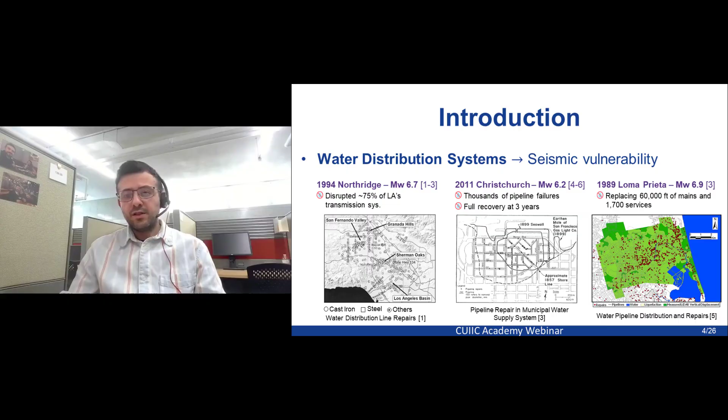So water distribution systems are very critical lifelines all around the world. However, seismic events expose their vulnerability. For example, in the 1994 Northridge earthquake, more than 70% of Los Angeles transmission systems were disrupted. Or in the 2011 Christchurch earthquake, the city experienced thousands of pipeline failures and the recovery of the whole system took more than 3 years. In another incident, the 1989 Loma Prieta, the city had to replace 60,000 feet of water main and 1,700 services.

There are many other events exposing the vulnerability of buried pipelines, like the 99 Kocaeli, 95 Kobe, and 2015 Gorkha earthquakes. However, we're not going to dig deep into each of these events. But the one thing that we can learn is that one of the pipe materials that failed the most during these events was cast iron pipes.

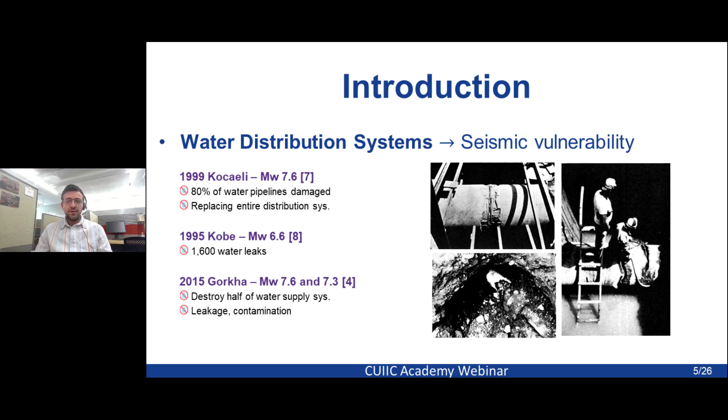Let's talk about cast iron pipes and why we focused on this type of pipe material. Around 50% of North American water mains are built from cast iron, a lot of which are very old and expected to be severely deteriorated. So in case of an earthquake, we can expect a lot of failures for this pipe material on our water mains. And past events show that among all pipe materials, cast iron, as we mentioned previously, has the highest seismic failure rates.

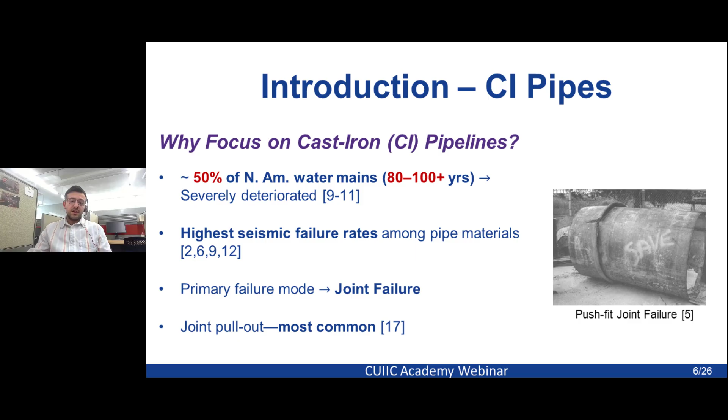And also the primary failure mode of these pipes is the joint pull-out mode, which is occurring as a type of joint failure mode. We can rehabilitate these aging cast iron pipelines through CIPP, or cured-in-place pipelining technology, which is a widely used trenchless rehabilitation technique. A recent survey by the mid 2010s showed more than 40,000 miles of CIPP rehabilitated pipes globally, and we expect that this number is much higher these days.

Basically, this method installs a resin-saturated liner in a deteriorated or cracked cast iron pipe. The thing that we need to know is that there are limited seismic fragility studies on CIPP pipes, and there is a good gap for research in this area.

Another question that we have to answer is network level analysis, and why we perform network level analysis instead of focusing on segmented pipes. For a water network, failure of a pipeline can propagate across the network and disrupt the connectivity, service path, and the whole demand satisfaction. The damage is not focused on the single pipe; rather, it propagates through the system.

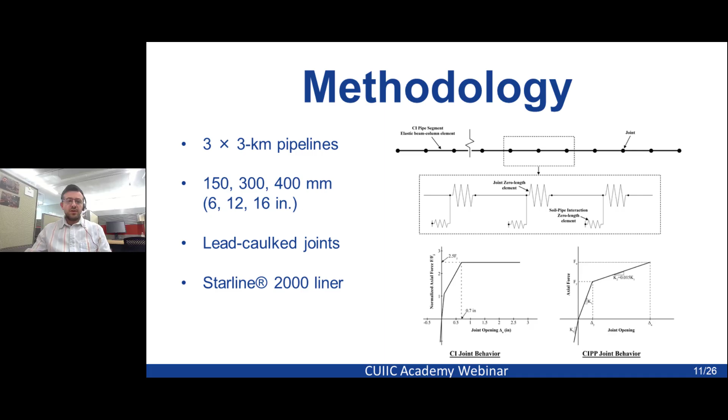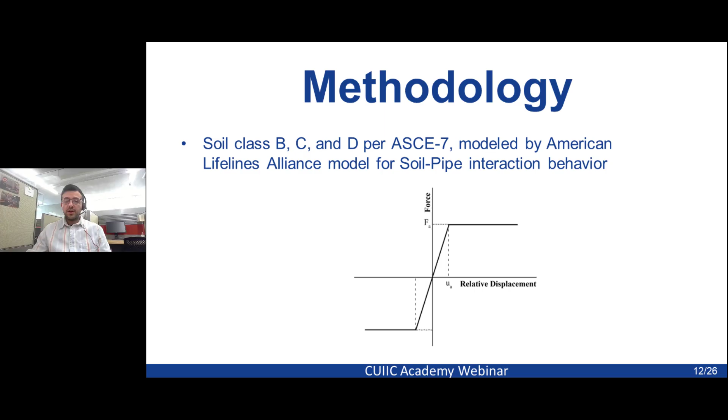For soil classes, we include soil class B, C, and D per ASCE 7, and we use the American Lifelines Alliance, or ALA's, common and popular soil-pipe interaction behavior model. And to perform IDA, 3 sets of 12 near-field ground motion records have been applied to the model, each set for a certain soil class: one for soil class D, one for soil class C, and the other one for soil class B.

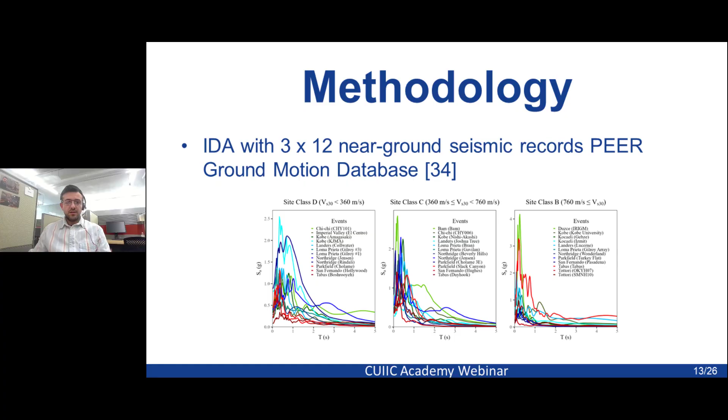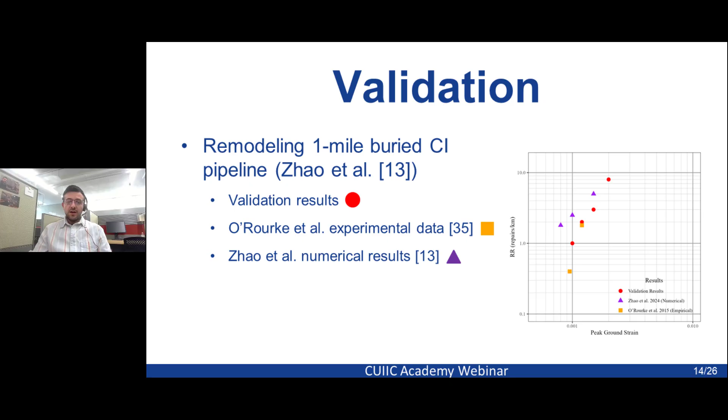After developing the model, we simply cannot use the model without validating it, right? We need to make sure that this model works reasonably and the results that it produces make sense. So for validation purposes, using the same methodology, we remodeled a 1-mile-long buried cast iron pipe, and we compared our results with experimental and numerical results from 2 different authors from their published works, and our results sat right between both, showing that our results can be reliable both experimentally and numerically.

Now let's talk about the results that we developed here. As I mentioned, one of the main goals of this phase was developing fragility relations. Fragility relations are nothing but calculating the repair rates, meaning the number of repairs per kilometer per different seismic level, in this case per different ground strain. We developed these relations for soil classes B, C, and D, for 6-inch, 12-inch, and 16-inch cast iron pipes, both with and without CIPP. And we're going to use this for the second phase.

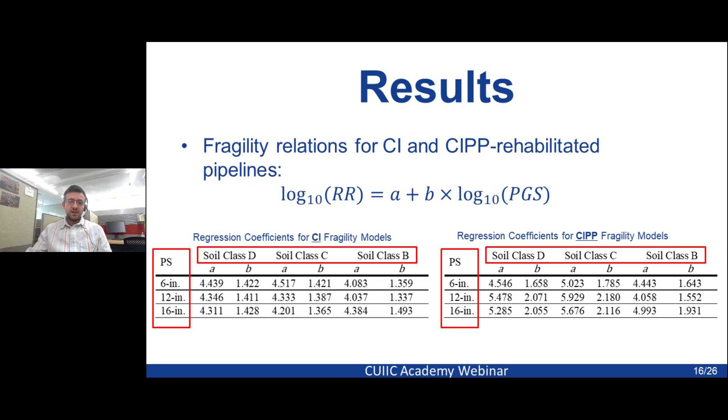So we use these relations to develop some regression models for 3 sets of soil and 3 sets of pipe sizes, with and without CIPP. Again, for 6, 12, and 16 inch, and for different soil classes.

Another set of results that we can discuss was repair rates versus ground velocity. So in previous fragility relations, we had repair rates per ground strain. This time, we developed repair rates per ground velocity for CIPP, and it shows that softer soil has higher repair rates for CIPP lined pipes.

And these higher repair rates are most pronounced at very high seismic demands and very high PGV, mostly above 200 centimeters per second, which basically represents a very strong seismic event.

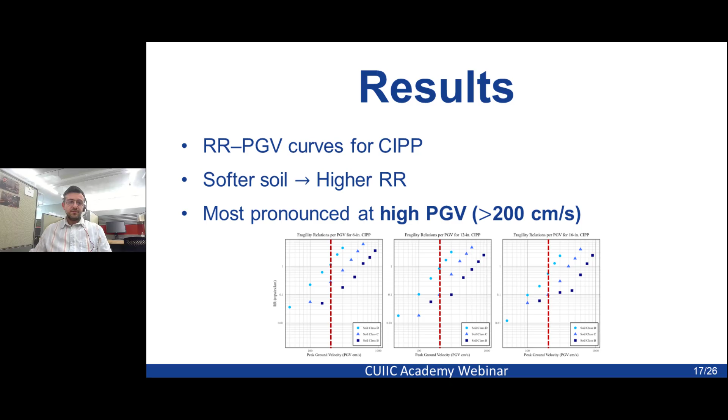Now let's use our relationships from phase 1 and start phase 2, which is network level seismic resilience assessment and CIPP rehabilitation. Our goal here is simply using the phase 1 fragility relations for our network assessment, developing random seismic scenarios, performing sensitivity analysis, and also developing a budget constrained CIPP rehabilitation plan.

In order to do so, our methodology is projecting water network benchmarks, namely D-Town and Exnet, which are famous benchmark water networks, onto Charleston, South Carolina. And why Charleston? Because in South Carolina, Charleston is considered the highest seismic hazard area for the whole state.

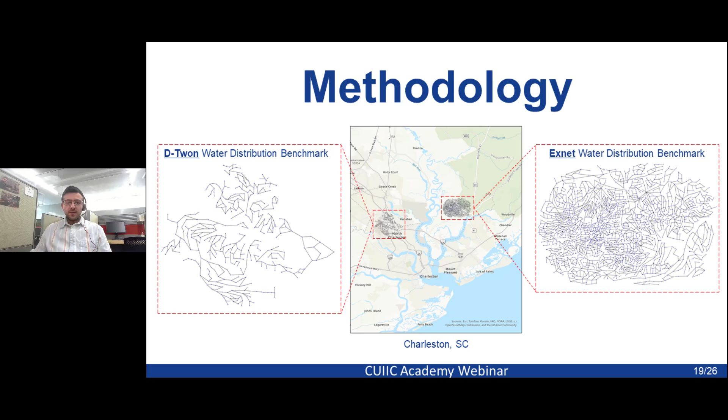After projecting our water networks there, we developed 10,000 random seismic scenarios for an earthquake with moment magnitude of 8. We collected our soil classes from available GIS datasets. Another thing to mention is that since our model is focused on cast iron pipes, all network pipes are modeled as cast iron.

In order to simply explain the methodology here, for the sake of our limited time, what we did was calculate the ground velocity using the available GMPE, ground motion prediction equation models for Eastern America. Then use these velocities to calculate the ground strain, and through that, calculate the repair rates that each

pipeline is experiencing. And from that repair rate, calculating failure probability, and basically each of these uses the output from the previous step in a new formulation. And then we use those failure probabilities for all the network pipelines to calculate the seismic resilience of the whole system. And through these steps, we are using the developed fragility relations from the first phase.

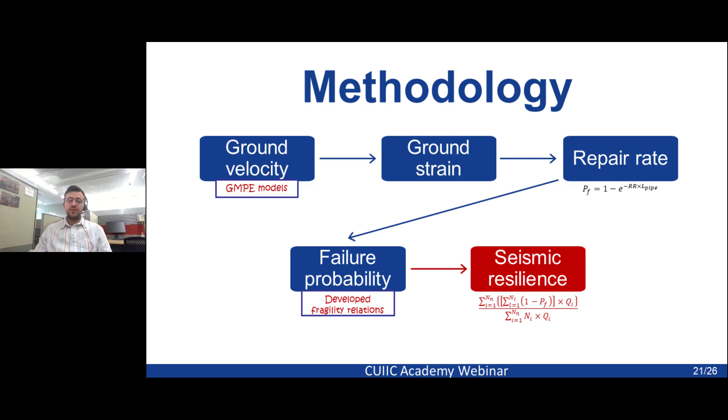Now let's talk about the results. So our results for 10,000 seismic scenarios for each of the Exnet and D-Town water distribution systems show that Exnet, which was the bigger water network, was showing an average of 59.4% seismic resilience. On the other hand, D-Town, which was the smaller scale water network, was showing a

66.7% seismic resilience. One thing that we need to know is that these numbers by themselves don't mean anything. What we are going to do with this and what we learn from this would be meaningful.

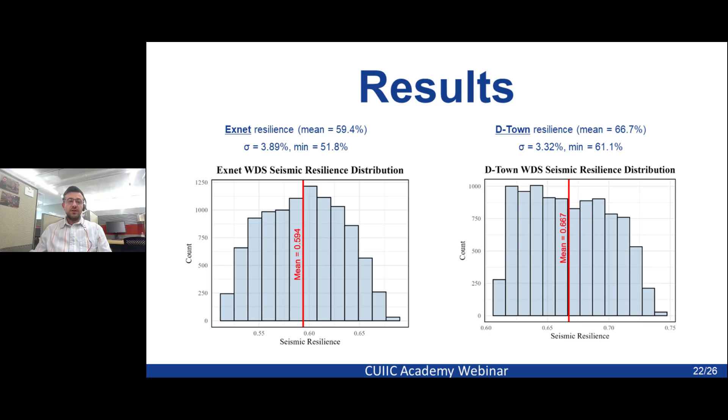For example, the sensitivity analysis that we performed was basically trying to see how sensitive our system was to pipe diameter, epicentral distance, magnitude, and soil stiffness. In other words, we wanted to check how much each of these parameters affects our final results.

According to the sensitivity analysis results, soil stiffness and earthquake magnitude affect our results the most, followed by epicentral distance. And surprisingly, pipe diameter, which one might think affects the system the most, affects the system the least. And this was a very interesting observation.

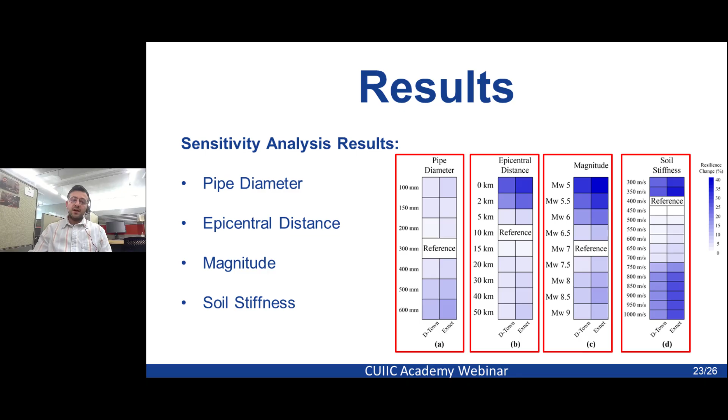Basically, it means if you want to calculate the seismic resilience of your area, of your network, more accurate data on your soil classes and your earthquake properties would give you the most accurate results.

In another part of our results, we selected the worst case seismic scenario from those 10,000 random seismic events, and we tried to assign a constrained budget to see how much CIPP rehabilitation can improve the seismic performance of the system.

Another question that might come up is why 15 million for one and 10 million for the other? And the answer is because of the different scale. Exnet was almost 5 times bigger than D-Town. So coming up with 15 million and 10 million would be relatively reasonable.

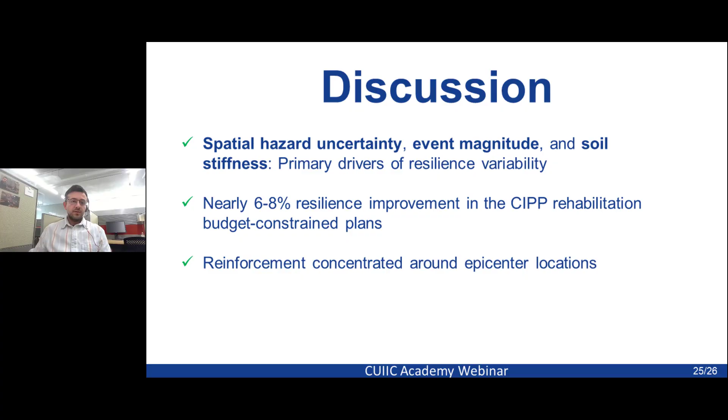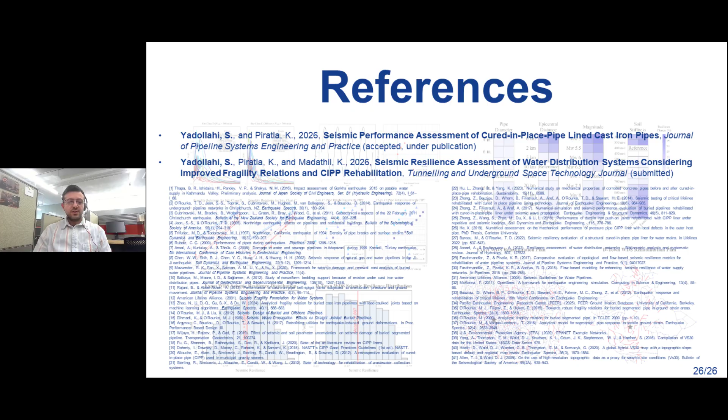The results of these studies for the first phase are already accepted and under publication in the Journal of Pipeline Systems Engineering and Practice. And for the second phase, the results have been submitted to the Tunnelling and Underground Space Technology journal, and you can see the remaining references that I used for this presentation.

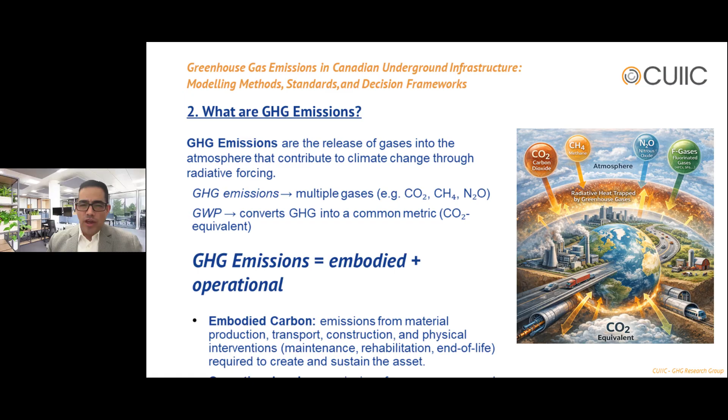So, oh, please don't move my slides.

We are going to discuss standards a little in a few minutes, but it's important to understand what life cycle assessment is. It's just a method to quantify environmental impact. In this case, the impact is GHG emissions. So what we are interested in is quantifying GHG emissions along the life cycle of the assets.

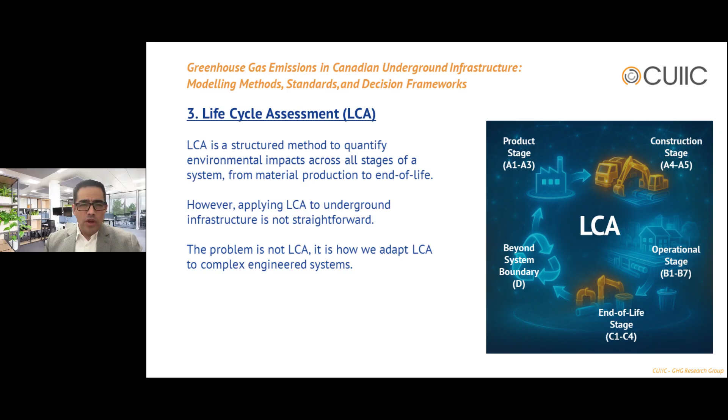Now, when we are dealing with life cycle assessment, there are many ways to approach this problem. That is why we are going to focus a little bit on this part, modeling. How are we going to model the GHG emissions? How are we going to quantify those emissions?

So the first thing we need to consider to understand this modeling of a life cycle assessment is the approach that we are going to take when dealing with life cycle assessment in underground infrastructure. Different assets, different systems can be approached in a different way. It's not the same if you try to approach the life cycle assessment of a building, something built on the surface, and something that is underground. Different approaches and some adjustments are necessary, and that is kind of what we are facing right now at CUIIC, and that is why we are interested in this discussion.

So approaches basically can be attributional or consequential. They are basically how we are going to consider that the asset is responsible for the GHG emissions. How we do that is going to define the kind of approach, and we are going to discuss more of that.

Then we can move to methods. Methods are basically the modeling frameworks, or the modeling considerations that allow us to get the numbers, and that's what's important for quantifying GHG emissions. And then we can move to techniques, and techniques are basically implementation tools, which allow us to approach the calculation of those emissions in different ways, like dynamic or probabilistic. So we need to consider also the techniques.

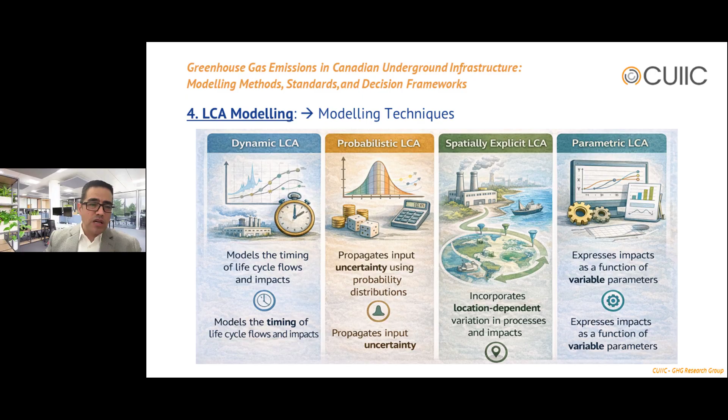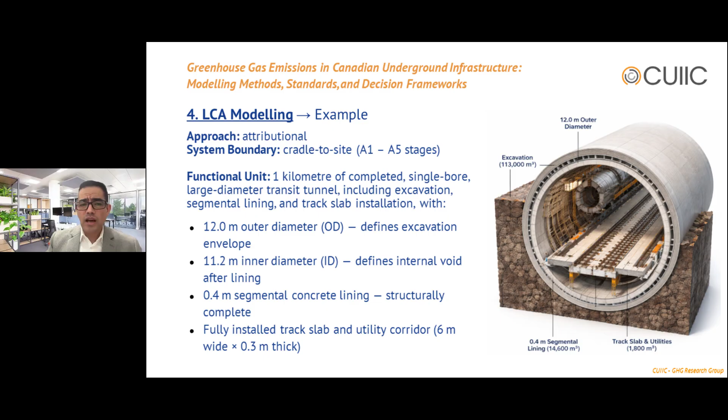If we see a short example, what we are seeing here is a tunnel. We are going to use the attributional approach, and the system boundary in this case is cradle to site. We are just considering stages A1 to A5. For the functional unit, we are considering 1 kilometer of the tunnel as a single bore, large diameter transit tunnel. We include excavation, segmental lining, track slabs, installation. Some dimensions are here. A basic example just to show you how to apply the process-based method.

In the process-based method, we take each activity like excavation, segmental lining, track slabs, and we quantify those activities, for example, in cubic meters. Then we apply an emission factor, and by multiplying those two, we get emissions in kilograms of CO2 equivalent. If we add them up, we get the total emissions for the functional unit, which was 1 kilometer of tunnel. It's a basic operation, just quantities times emission factors. Then if we move to the input-output method, we are no longer interested in the emission factor itself.

We are mostly interested now in how much was spent in excavation, how much was spent in lining. And then we use emission intensity factors, and those emission intensities are going to give me the possibility to calculate the GHG emissions. So in this case, because of the emission intensities, I'm getting a lower value, in this case 3.6 million kg or 3,600 tons of CO2 equivalent.

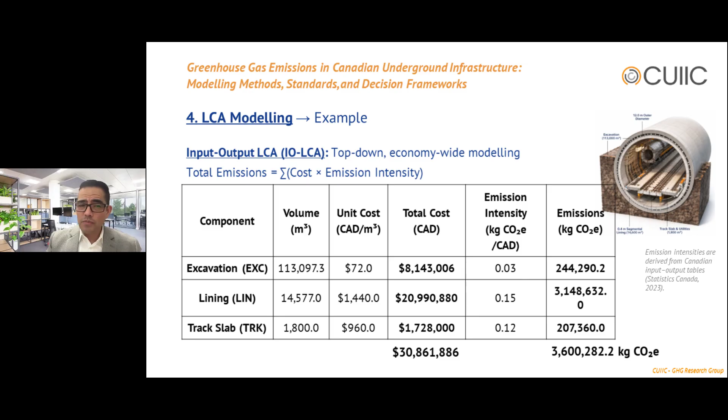The hybrid approach is kind of a combination of the previous two. And that approach is allowing me to consider, for example, an overhead of indirect cost, things that were not considered in the process-based approach. And by considering a percentage of that indirect cost, what I'm doing is getting an extra value to add to the process-based result, and we are getting a little bit more of GHG emissions

when we compare the results. So basically, if in this slide you are comparing the three methods, you are seeing that the process-based is giving you something like 5.65 million kg of CO2, while the input-output method is about 3.6 million kg, and the hybrid is a little bit higher, like 5.5% higher than the process-based method. Those are methods.

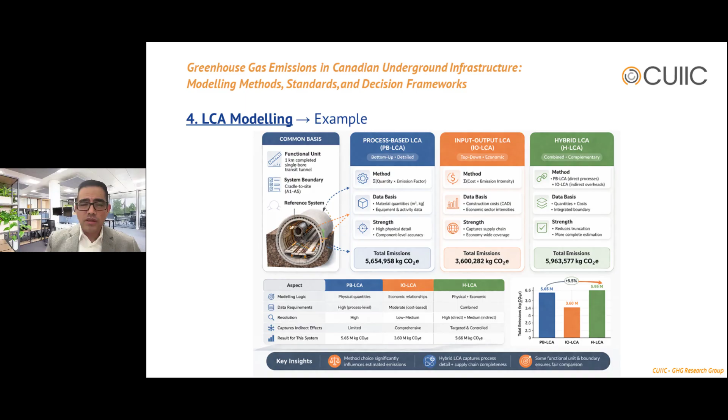But now, when we are dealing with this life cycle assessment in underground infrastructure, we need to discuss decision frameworks. And the best way to define a decision framework is how are we going to calculate those GHG emissions along the life cycle of the system. In order to do that, we need to define a framework that is allowing us to be procedural, to be integrative, to be standard aligned, and to be decision-oriented.

Basically, what we want is that the framework we are defining organizes the sequences of activities or the workflow that allow us to consider all the things that we need to account for the GHG emissions. We are going to do that in an integrative way, which means that we are going to consider every single activity in the design, and we are going to convert that into an impact, which means into a GHG emission.

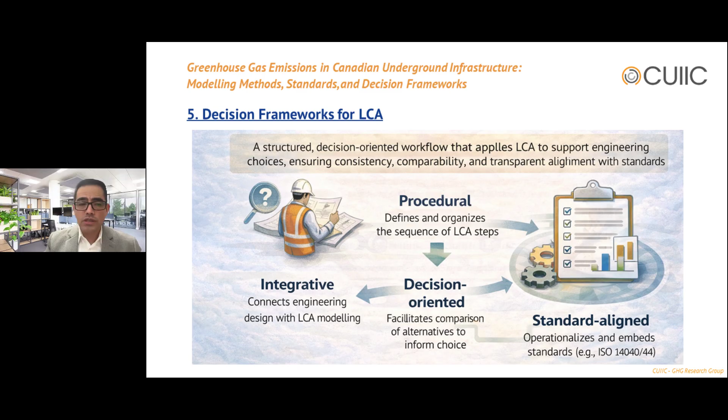By doing that, we need to be standard aligned, and all these three things are going to allow me to make decisions. If the GHG emissions are too high, then I can change something in the design. And this approach, being integrative, is allowing me to change things that are actually reflecting into lower GHG emissions. So these are examples of frameworks for you to know.

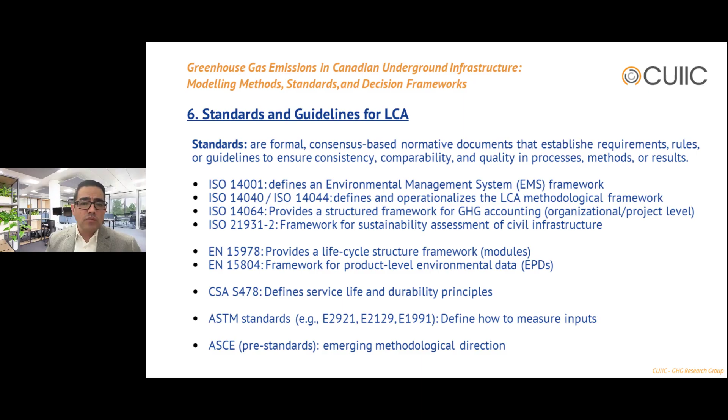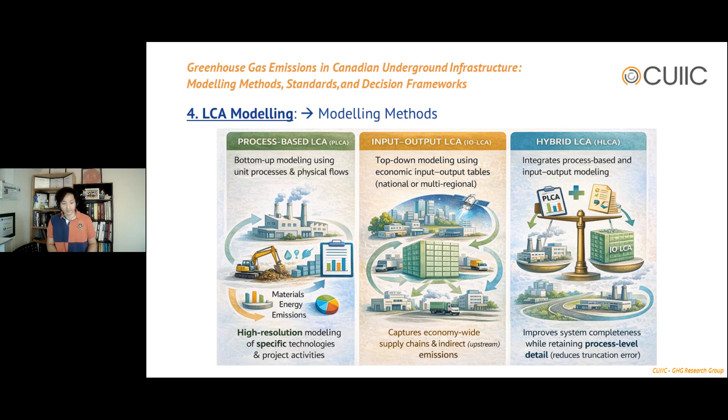But this is not exactly for water mains, and I see the question is more related to water mains. I don't have a slide for water mains, but let's think about the same thing. We consider what is the main driver for GHG emission when we are dealing with water mains or water supply systems. Once we have the main driver, let's say the pipes, then we start doing a very high detail analysis, considering things like what happens with the friction losses inside the pipe, or with the pumping cost.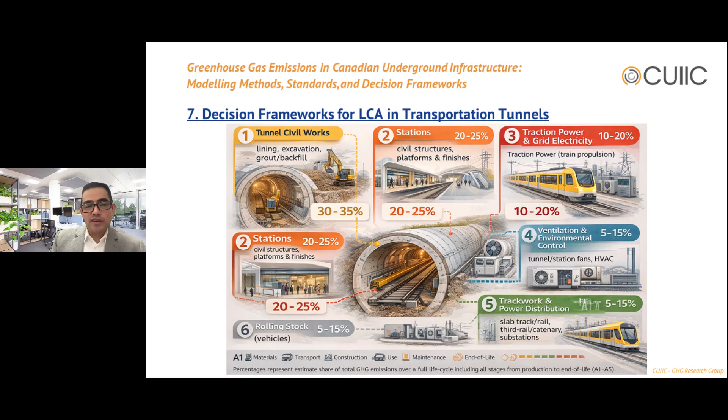In order to consider those aspects in the calculations, we need to use the process-based method. If we use the process-based method, we are going to consider friction losses, pumping cost, everything. But if you are using the input-output method, that is going to be more general. We are not that interested in specific pumping costs or how much pumping is associated to the friction losses in the pipe. We are just looking in general at how much we spend in pumping, and that is going to be part of the calculations.

But remember, we said at the beginning that pumping is mostly about operational carbon, and in this presentation we are not focused on operational. The analysis could be similar. You can use the same methods and techniques to do the calculations, but pumping costs are mostly operational, and we are mostly focused on embodied carbon.